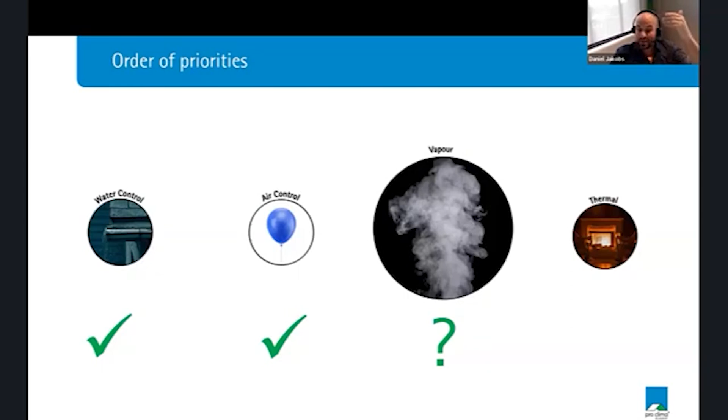Normally vapor always goes the way of least resistance. The first way was convection, and now that doesn't work anymore. So now it starts to travel through the structures, which is called diffusion. It starts to diffuse through the walls. And as plasterboard is highly vapor permeable, we can't consider that we have a lot of resistance in our structure. So we have to protect our structure from moisture traveling into it with a smart vapor control layer, which we're going to talk about later. Part 2 would be that we actually need a ventilation concept.

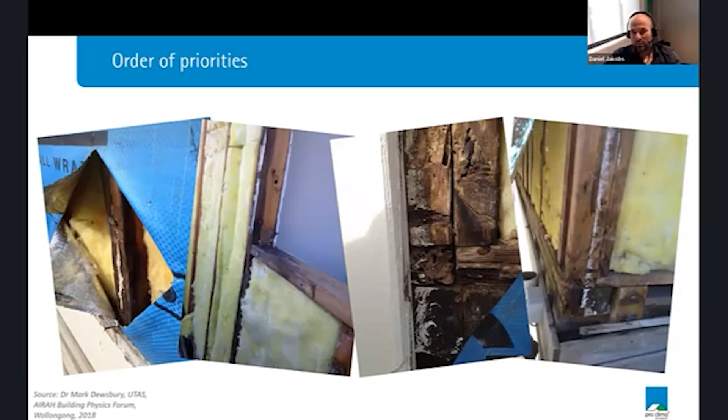If you trap moisture, like here in Tassie, with these good old aluminium foils, which are a perfect vapor barrier, sitting on the outside of the structure, it is a nightmare. And this can happen after a few years. That's why you can't have vapor barriers on the outside of the structure. Handling and understanding moisture means you have to understand different types of leaks.

We have an energy leak, which in my opinion is most times a thermal bridge. If you have a steel structure or steel beams attached to the outside and the inside, you could create a cold surface on the inside. This is called a thermal bridge, well known from the passive house movement. And you could have mold spots on your plasterboard on the inside.

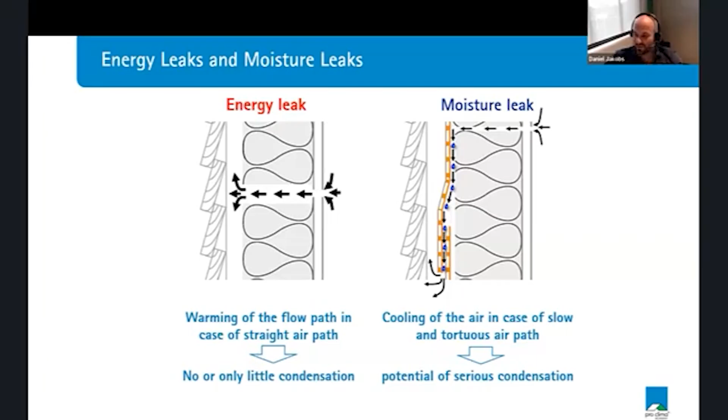A more tricky one is a moisture leak, which is via convection again. You have a leak on one end, and slowly the warm, moist air travels to the outside. It will condense on the way to the outside. This is a typical moisture leak, because on random spots you have mold, condensation and rotten timbers. That's why I always recommend understanding these two types.

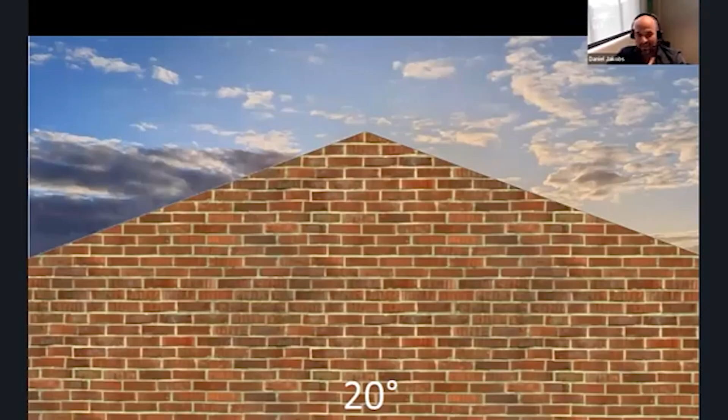So finally, going to the flat roof: why do we build flat roofs? We all agree that's a pretty nice view here. It's in Clovelly in Sydney. The worst case is that you have a building site. At the moment there is a massive building site in front of this house. And the worst case is the whole nice few-million-dollar view is completely blocked. We all agree that's not what you want.

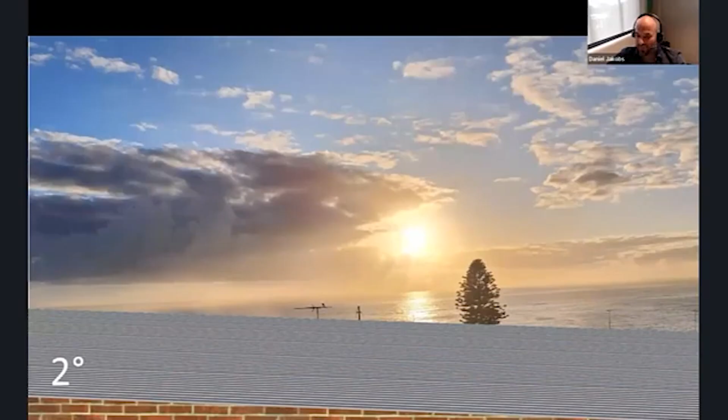So now the big gambling and negotiation starts. We fight for each single degree on your roof because you want to get it down. Now it makes sense why we want to go down to 2 degrees, because at least you have something left of the ocean view. There's a reason: we have height restrictions, specifically in dense areas, and we want to have the views. Now to find out where the problems are and how to solve them, because the problem with a low-pitch roof is that it takes quite a while for the water to run off.

At 2 degrees, sometimes water is just sitting there, and if you have a little bit of wind pressure, water can't run off at all. So it means you have water sitting on your joints and on difficult junctions, and wind pressure, because you have wind today, and the wind pressure will just drive the moisture through all gaps and cracks, even via capillary.

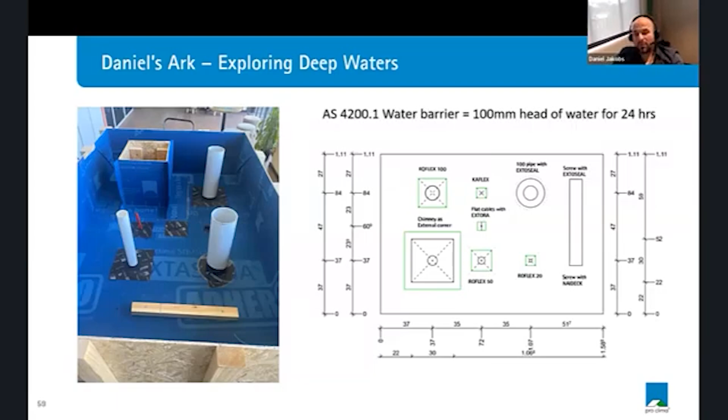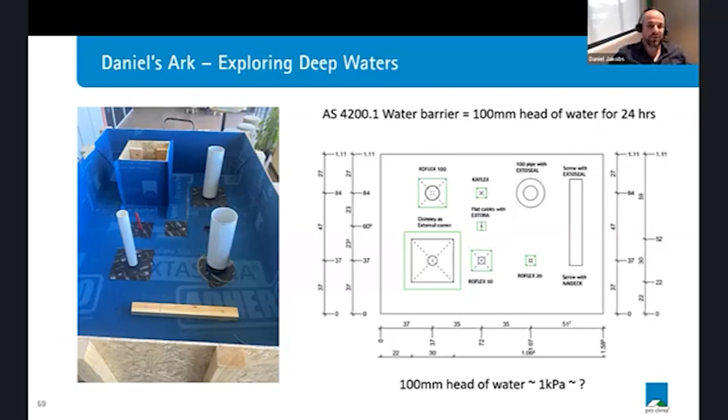So before I said, okay, let's figure out where the problems are, I really wanted to understand the problems. To be code compliant for membranes, you have to hold 100 millimeters of water for 24 hours, which equals 1 kilopascal. And to be honest, when I was building this box, back then during COVID, I was pretty confident. I thought, easy. I know exactly what's happening and I know it all. I'm smart, and I just started it.

And I came up with all sorts of funky ideas and basic ones, and it was leaking. So there was a first kickback. So actually, I wasn't as smart as I thought. So I had to change my detail, and I used a specific stretchy tape to actually seal it around. Then about the chimney, I came up with a super fancy origami taping technique, how to tape around chimneys, because I wanted to avoid other products. And I thought, it must work for sure.

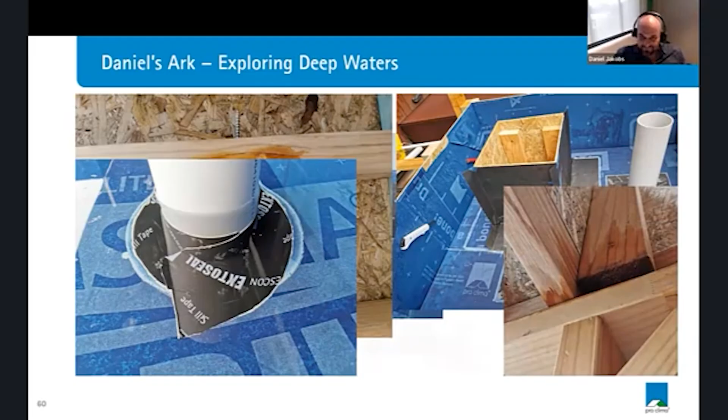And 3 or 4 corners leaked too. So another big learning for me. So I had to change it again. I went back to the stretchy tape because I just realized having the right products for the right applications in the end is faster and cheaper. And this is how it went all the way through. And this is how I came up with the Adhero system, where I'm pretty precise on how things are working.

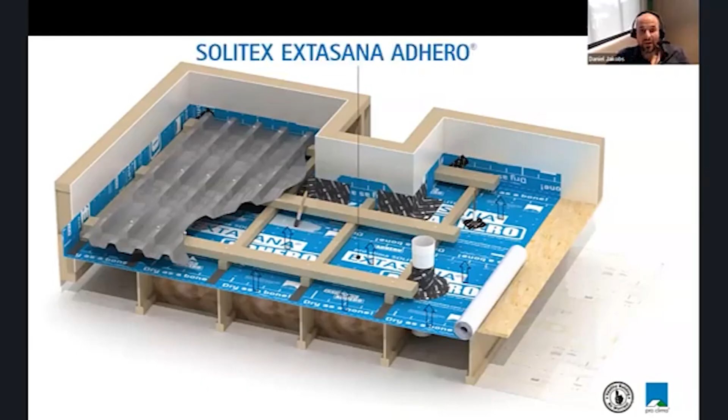And as always, we have to think of it as a system. It doesn't matter if you talk about our pro clima products or other competitor products. We always think about systems, not products. It's very important. And it's also important to understand how a structure is working. For the roof structure, we're always trying to create the highest drying potential. That's why we always recommend having a smart vapor control layer on the inside to stop internal moisture getting into our structure. And we want to have the highest drying potential to the outside too.

And we also have to understand that building materials are never 100% dry. My experience here in Australia is quite often the opposite. Sometimes it feels like we're trying to introduce as much moisture into the structure as possible before we cover it up with membranes. So the important part is we have to keep our structure dry over the whole period of time.

When you have a standing seam, it's kind of a tricky one. With the standing seam, specifically in this buildup, you always have to have a separation layer. You can't have standing seam directly on the membrane, because otherwise you have a cold surface hard against the membrane, and you might end up with a soggy board. That's why this separation mesh, even if it's just 8 millimeters, allows a drainage layer for the standing seam or flat metal roof. Very important to say, this is not a ventilation layer. This is just a pure drainage and separation layer. And this system has to work with the smart vapor control layer only, because there's nothing else which can actually make it work.

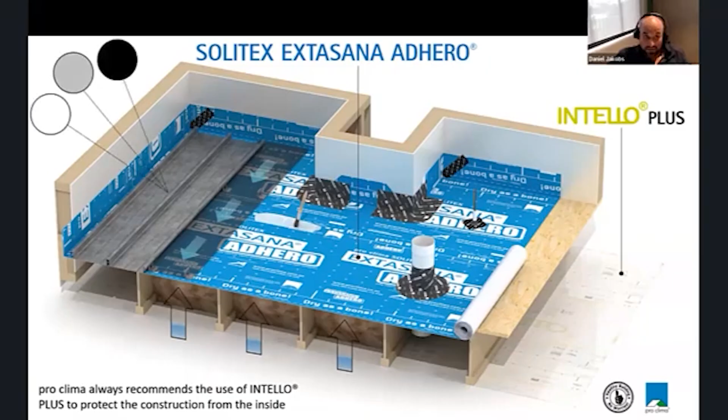Also, as this will never ever be a deemed-to-satisfy solution, you have to do WUFI calcs, and the color of the roof will matter. In quite a few climates and orientations, you actually have to go with a dark colored roof. I know the market is driving to white colored roofs because we don't want overheating of our roof structure. But with a white colored roof, you might not have enough energy to drive your moisture back, because in summer, when sun hits the roof sheets, it creates a reverse moisture drive. Now your structure can dry out to the inside, because we have this smart vapor control layer in here. Same with materials, they can also dry out to the inside.

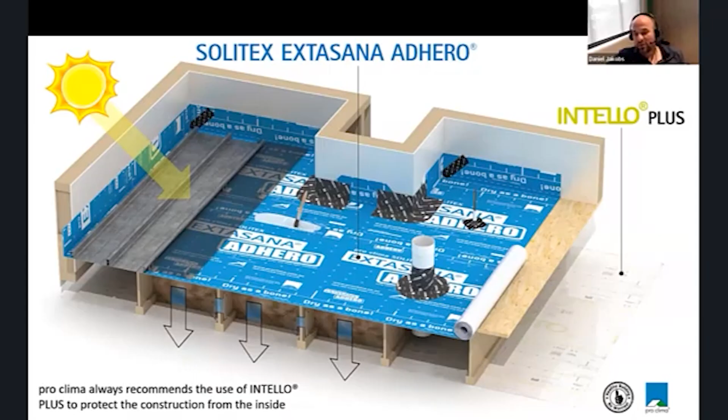Very important: the better case is always if you can separate your roof sheeting from the membrane, as you can see here, and have a properly drained and ventilated roof structure. The thing is, with a very, very low roof pitch, we have something like a stagnant effect, so we don't have a proper ventilation layer anymore. That's why the ventilation heights get more and more. We say if the roof is up to 10 meters, you should have a minimum 50 mil ventilation layer. If the roof is longer than 10 meters, you should actually have 150 millimeters of ventilation.

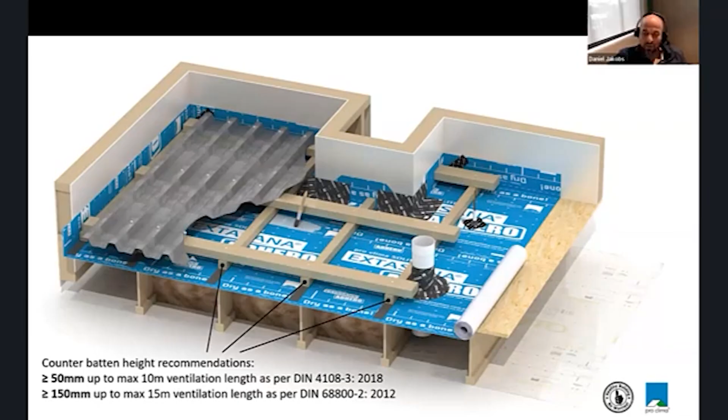I know no one will do it, but it's very important to mention, because international studies from Germany, from Lund University, and from the US show that ventilation is very important to get rid of moisture. These are based on the German standards. I know it will take a while before we implement them, but I think it's very important to understand the risk of moisture in our roof cavity.